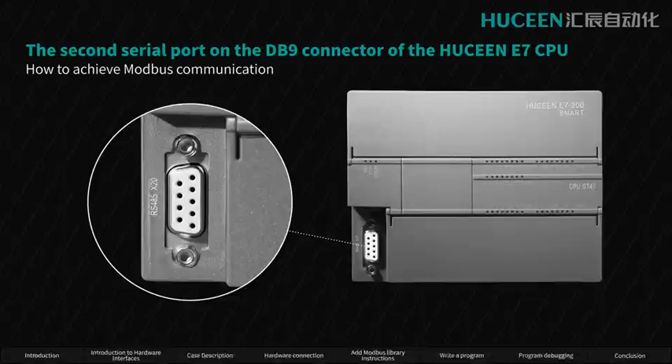Hello, everyone. Now I will introduce to you how to achieve Modbus communication through the second serial port on the DB9 of Huceen E7 CPU.

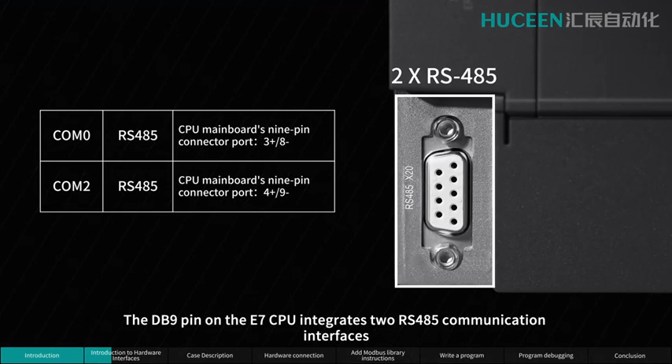The DB9 pin on the E7 CPU integrates two RS485 communication interfaces. Among them, pins 3 and 8 are the first RS485 interface, and pins 4 and 9 are the second RS485 interface.

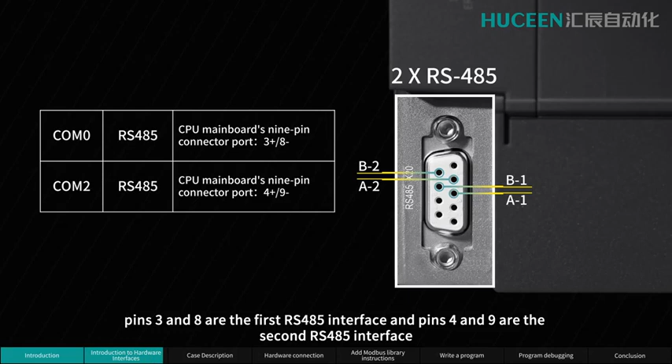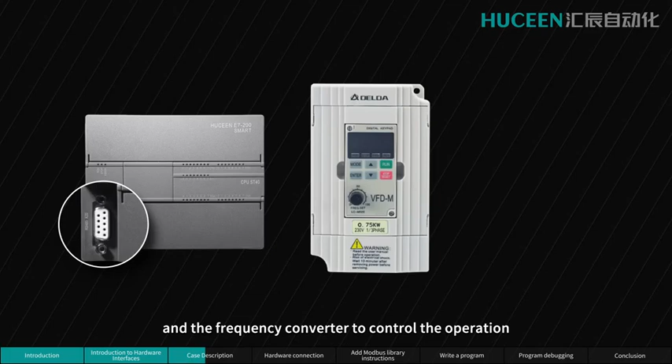Taking the communication between the second RS485 interface on the E7 CPU body port and the frequency converter to control the operation of the frequency converter, adjust the speed, and read the output voltage value of the frequency converter during operation as an example, I will explain how to use this RS485 interface.

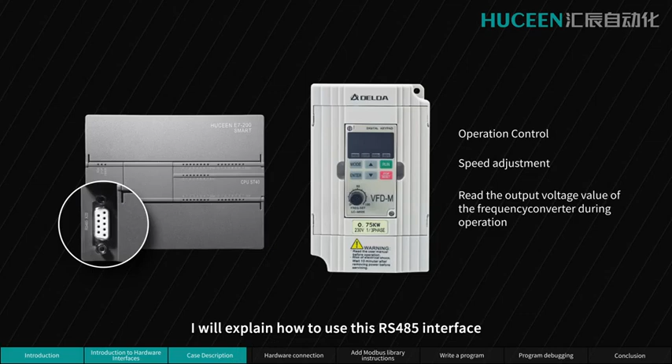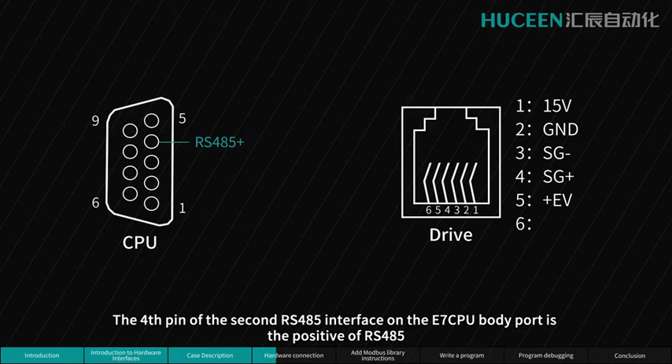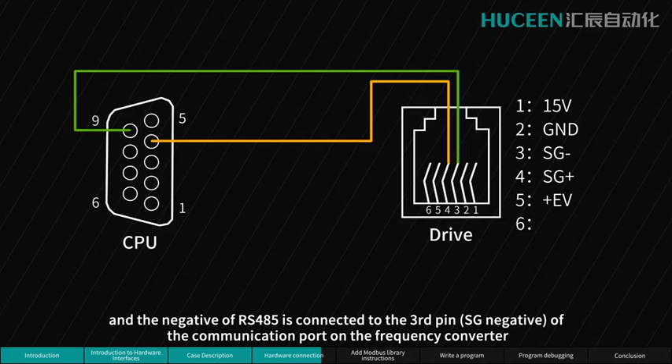The fourth pin of the second RS485 interface on the E7 CPU body port is the positive of RS485, and the ninth pin is the negative of RS485. The positive of RS485 is connected to the fourth pin, SG positive, of the communication port on the frequency converter, and the negative of RS485 is connected to the third pin, SG negative, of the communication port on the frequency converter. A DB9 male connector is required for connection on the CPU side.

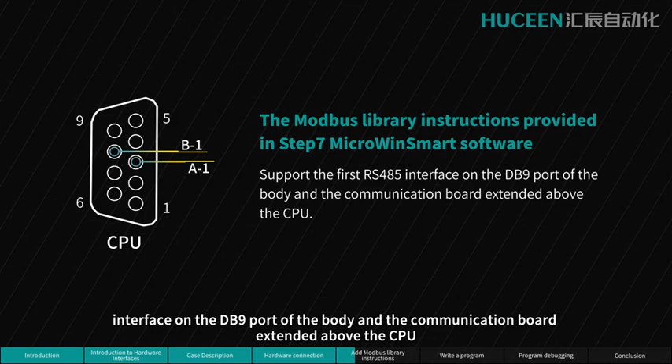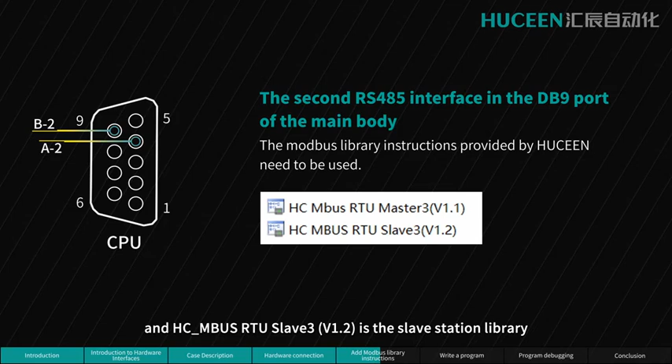First, the Modbus library instructions provided in Step 7 MicroWinSmart software support the first RS485 interface on the DB9 port of the body and the communication board extended above the CPU. The second RS485 interface on the DB9 port of the body requires the use of the Modbus library instructions provided by Huceen. HC Mbus RTU Master 3 V1.1 is the master station library, and HC MBUS RTU Slave 3 V1.2 is the slave station library.

Second, right-click on the library, select Open Library File, then copy and paste the two Modbus library instructions into this folder and close it. Right-click on the library and select Refresh Library, and the added Modbus library instructions will appear in the instruction library.

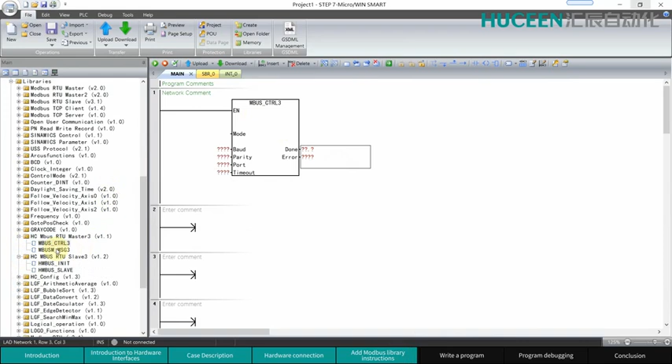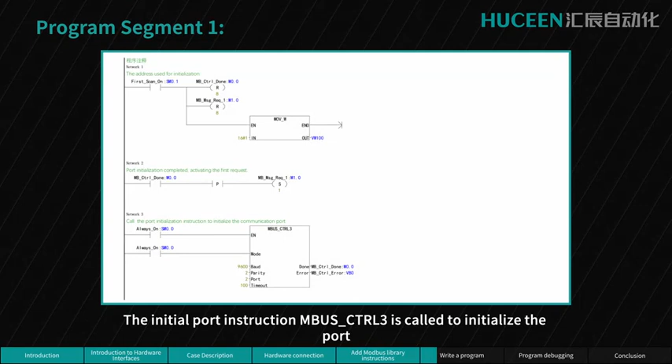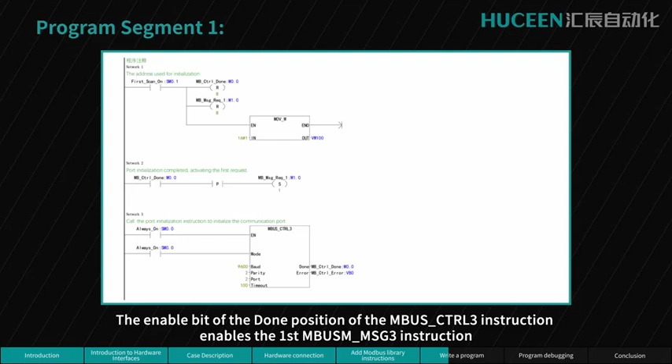After setting the communication parameters of the frequency converter according to the frequency converter manual, call the added Modbus library instructions and write the PLC communication program. Program Segment 1, the initial port instruction MBUS_CTRL3 is called to initialize the port. The parameters of the instruction are filled in combination with the parameters of the frequency converter. The done bit of the MBUS_CTRL3 instruction enables the first MBUSM_MSG3 instruction.

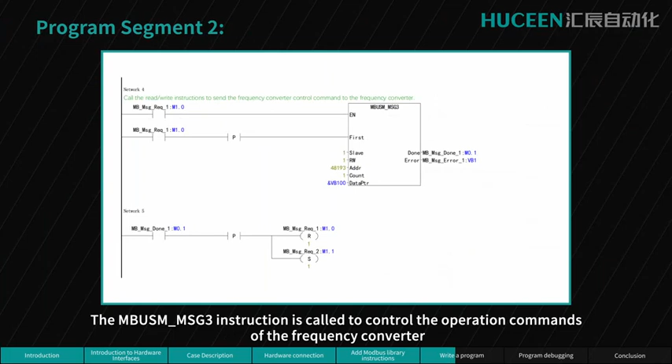Program Segment 2, the MBUSM_MSG3 instruction is called to control the operation commands of the frequency converter. After the execution of this instruction, the enable condition of the instruction is reset using the done bit on the instruction, and the enable bit of the next MBUSM_MSG3 instruction is set.

Program Segment 3, again invoke the MBUSM_MSG3 instruction to set the speed of the inverter. After this instruction is executed, use the done bit on the instruction to reset the enabling condition of the instruction and set the enabling bit of the next MBUSM_MSG3 instruction.

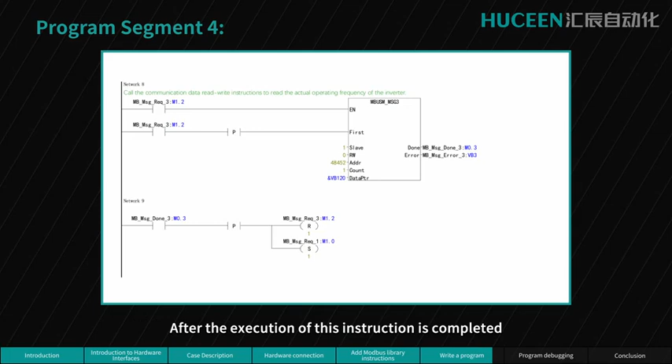Program Segment 4, again invoke the MBUSM_MSG3 instruction to read the actual operating frequency of the inverter. After the execution of this instruction is completed, use the done bit on the instruction to reset the enabling condition of the instruction and set the enabling bit of the first MBUSM_MSG3 instruction to enable it to execute in a loop.

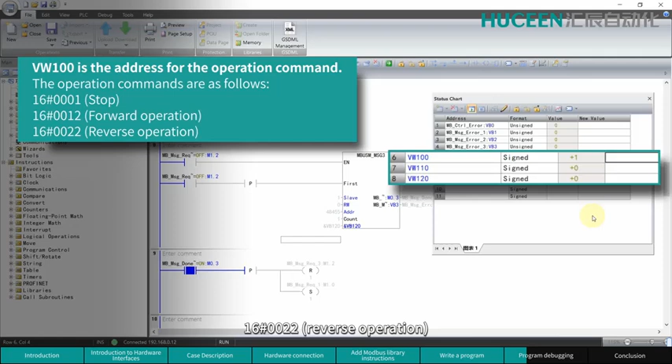First, download the compiled program to the CPU. After downloading the program to the CPU, use the status chart to monitor the VW100, VW110, and VW120 addresses. Among them, VW100 is the operation command address. The operation commands are 16#0001 stop, 16#0012 forward operation, 16#0022 reverse operation.

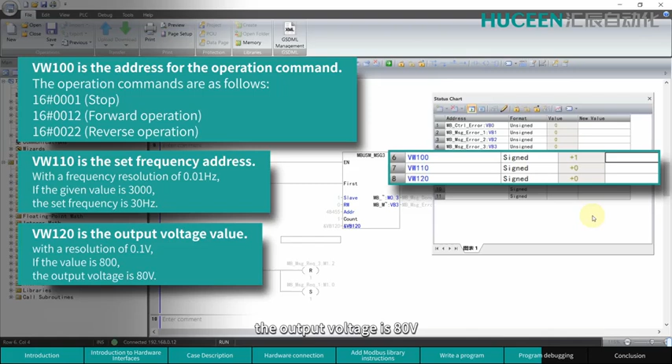VW110 is the set frequency address with a frequency resolution of 0.01 Hz. If the given value is 3000, the set frequency is 30 Hz. VW120 is the output voltage value with a resolution of 0.1 volts. If the value is 800, the output voltage is 80 volts.

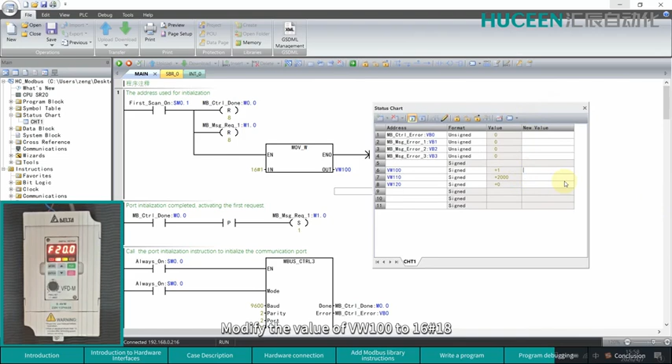Parameter modification instructions. Modify the value of VW110 to 2000, indicating a set frequency of 20 Hz. After the instruction is executed, this frequency will be written to the frequency converter. Modify the value of VW100 to 16#18, giving the frequency converter a forward operation command. At this time, the frequency converter operates forward, and the current output voltage value of the frequency converter is displayed in VW120 as 901, indicating a current output voltage of 90.1 volts.

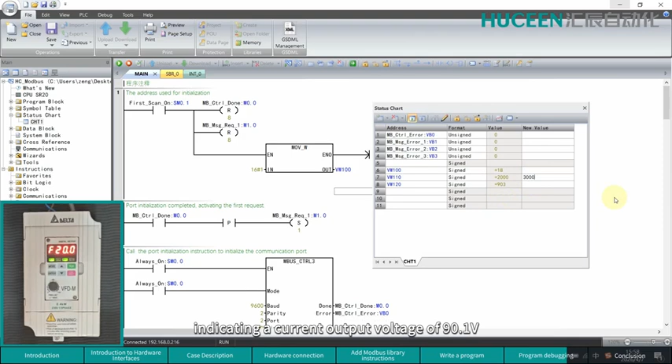Modify the value of VW110 to 3000, indicating a set frequency of 30 Hz. At this time, the current output voltage value of the frequency converter is displayed in VW120 as 1330, indicating a current output voltage of 133.0 volts. Modify the value of VW100 to 1, and the frequency converter stops operating. The output voltage value in VW120 becomes 0.

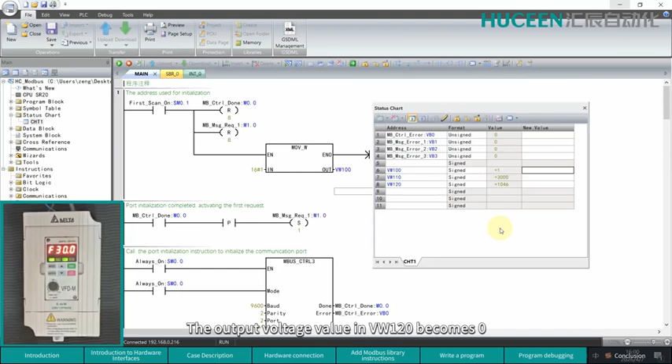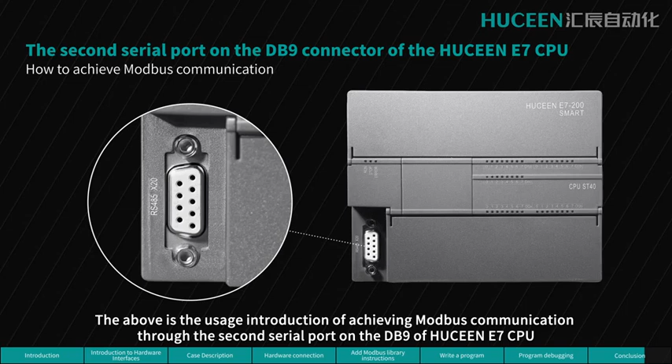The above is the usage introduction of achieving Modbus communication through the second serial port on the DB9 of HUCEEN E7 CPU. Thank you all for watching.